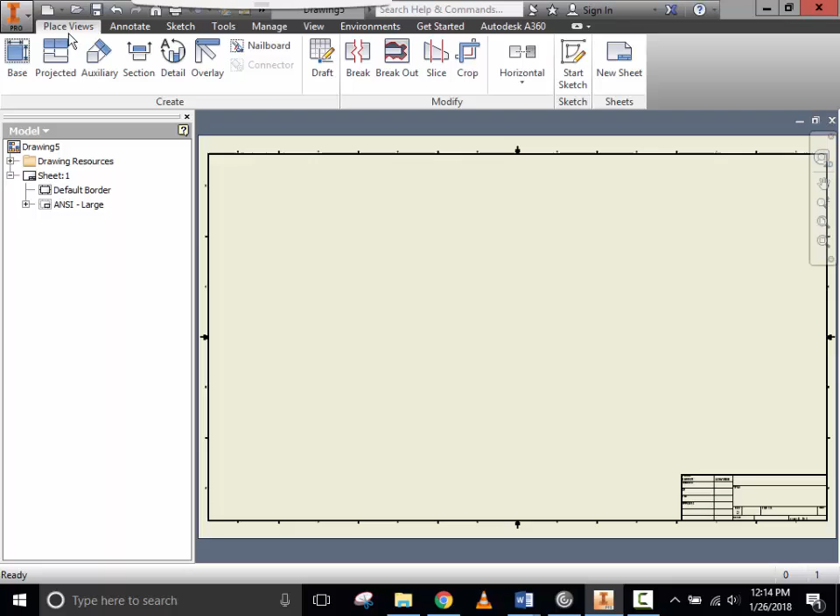Click and create. This brings us to the Place Views tab, where we are going to select a base view for this.

We need to go search for that in the file. We need to open an existing file and search through there, and you need to select your H drive to find this because everything is saved in there.

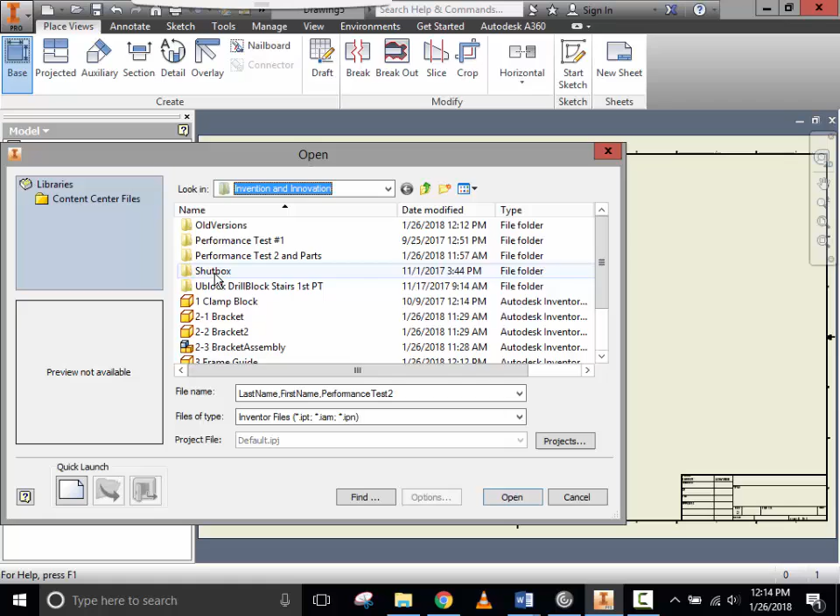As you've seen in previous videos, I have some extra folders within my H drive, and we're going to find our full assembly. I would like you guys to open up the Shutbox final assembly.

And we're going to drag this drawing view box just slightly off our screen so we can see a little better.

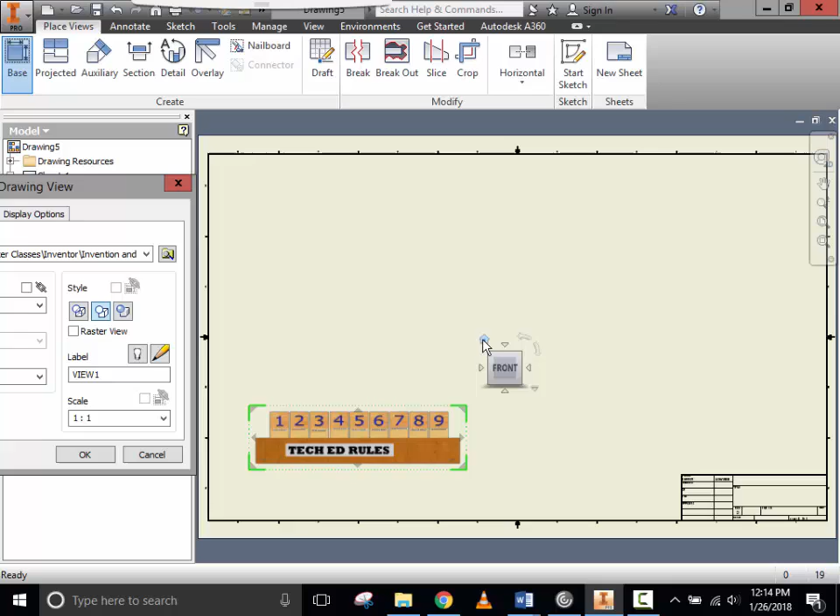I want to come up and grab the home view of my Shutbox, and I'm going to click on it and drag it off to the side.

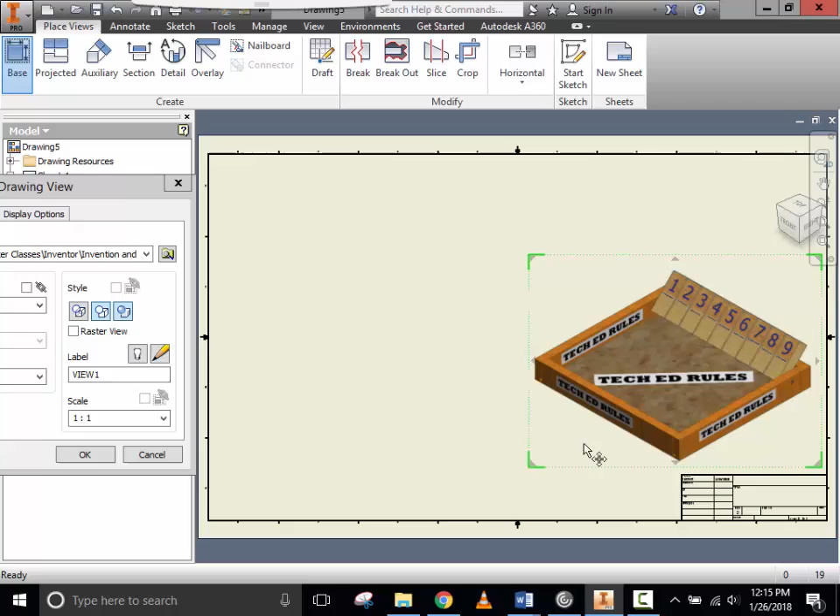Now it comes in a little small, so we can experiment with sizes. If we went 1:1, that does fit pretty good. If we try 2:1, it's a little too big.

So we're going to have a 1:1 Shutbox over here on the right. We want to make sure that it is shaded. If this is not already highlighted blue in the background here, you want to click to highlight it and click OK.

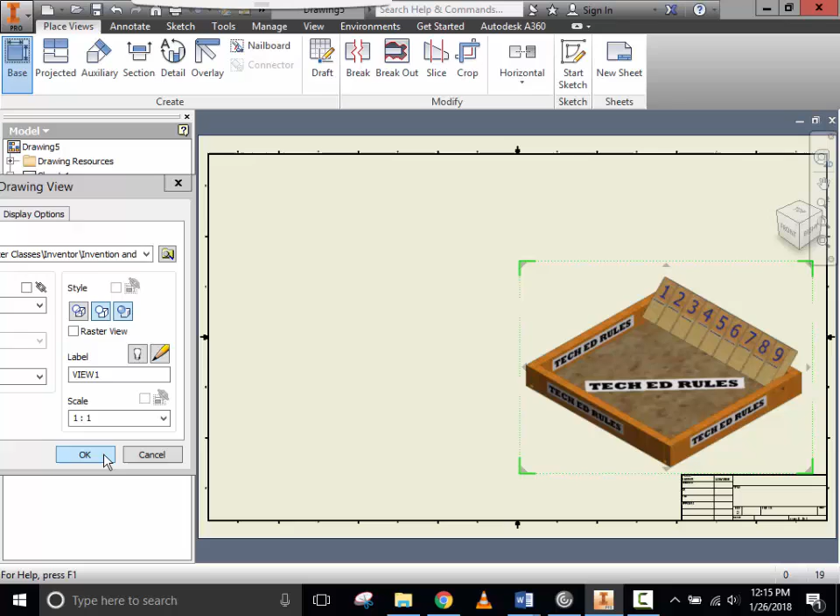Next, we're going to come and grab a base. We're going to search, and we're looking for the exact same assembly. This time, I'm going to have you select the home view.

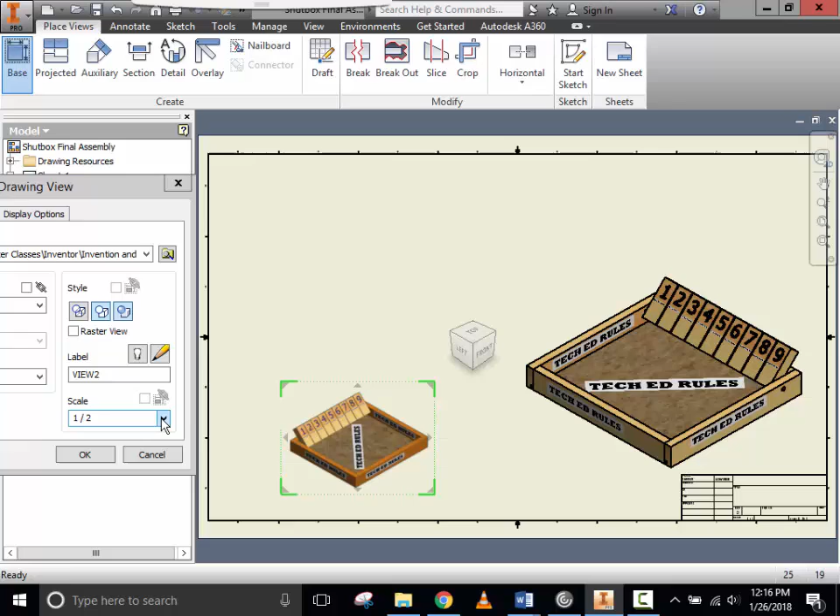Instead of just using the home view, which is this corner right here, we're going to select this other front corner so we can see from both directions. This is also going to be set to a 1/2 scale. We're going to line it up by clicking and dragging and make sure that it's shaded before we click OK.

Now both of these, this is the same file, you notice is made with all of the tech ed parts. These were the ones that were given to you if you needed to use them. But let's say yours was a mixture.

You used some of our parts and you used some of yours. If this is all you turned in, you could only get a good grade for the assembly, which is all together. There's no grade here for the parts because you don't have any that you've drawn yourself.

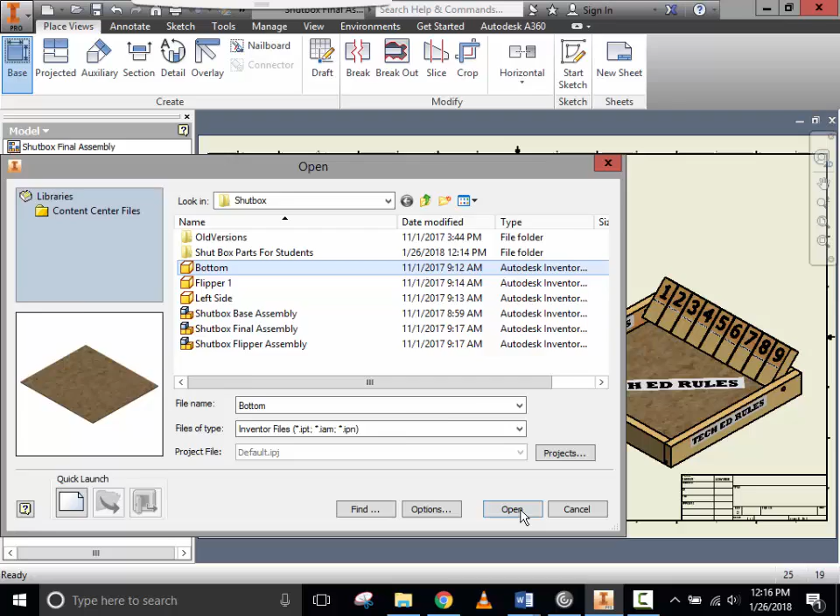So if you drew some but they're not part of the assembly, we're going to come up to base. We're going to search, and you're going to grab any part that you made that is not on there. For instance, this base here, the bottom, I'm going to go to the home view, click, drag, I want it to be shaded, has to be shaded, and click OK.

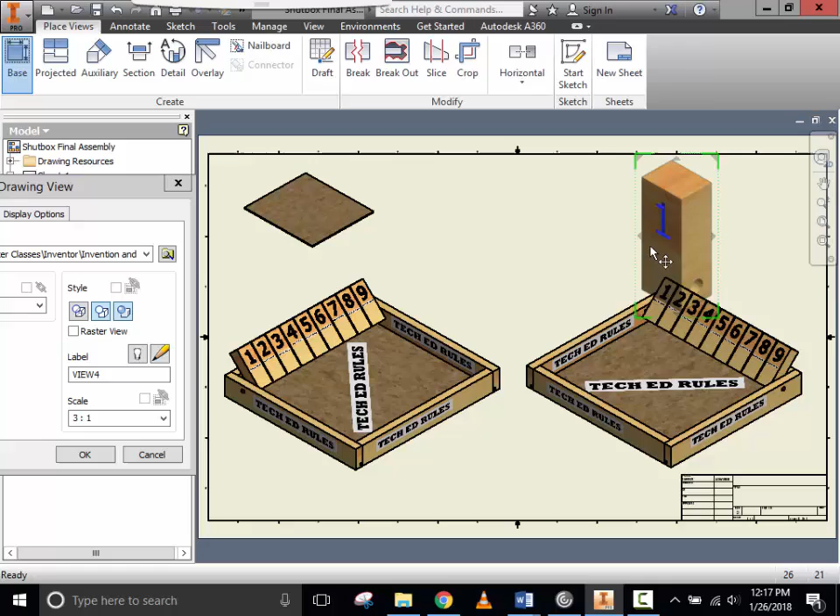I'm going to grab a base view and search. I made a flipper. I didn't make all 9, but I made a flipper. I'm going to go to the home view, click, drag. If you want to make it smaller, you're welcome to do that. Make sure it's shaded and OK.

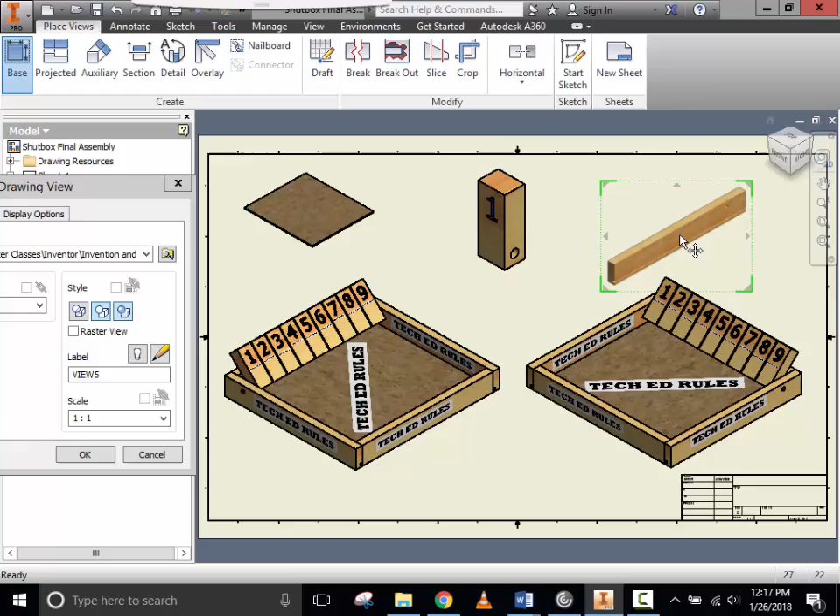I actually drew one more part. I'm going to search, and I drew the left side. So I'm going to go to the home view. That looks like it'll fit just fine. It's shaded. I'll click OK.

So now you can get a good grade for your assembly, and you've shown me some of the parts that you've made. Hopefully you've made all of the parts and used your own, but if you did have to use mine, I want to see what you drew also.

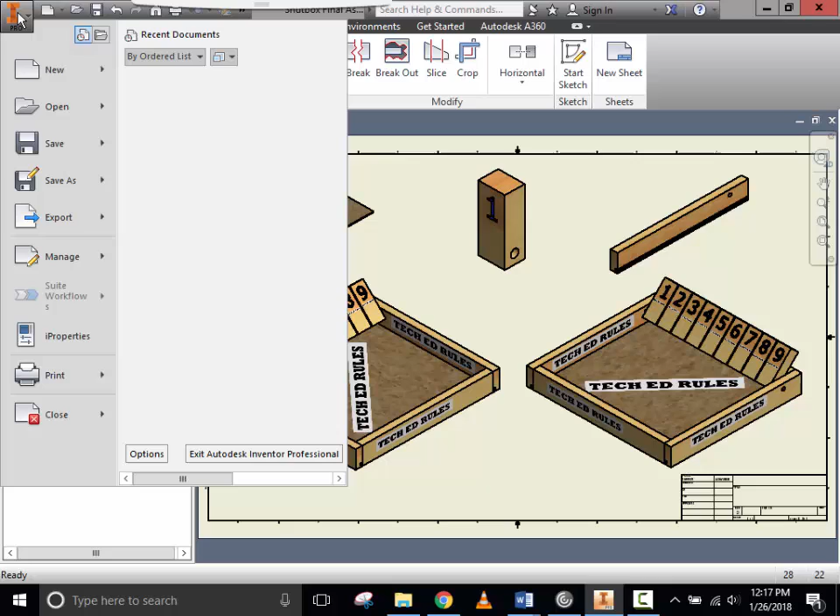Finally, we're going to come up to the Inventor icon. We're going to come down and click Save As, and we are going to save this to our H drive again. Make sure it's going there, not into your network or your C drive.

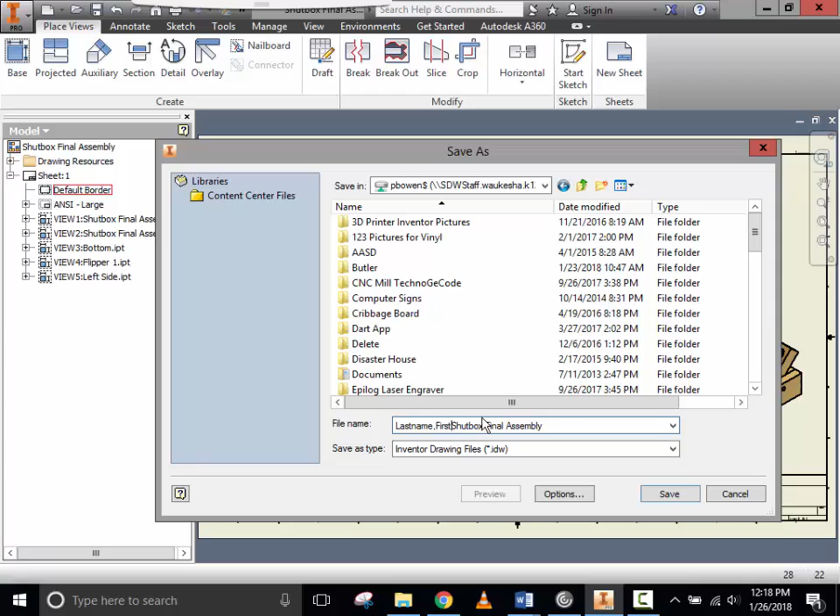H drive, and it's called Shutbox Final Assembly. That's pretty good. I'm also going to call it last name, comma, first name. Again, these are your actual last name and first name.

Shutbox Final Assembly. I'm going to click Save.

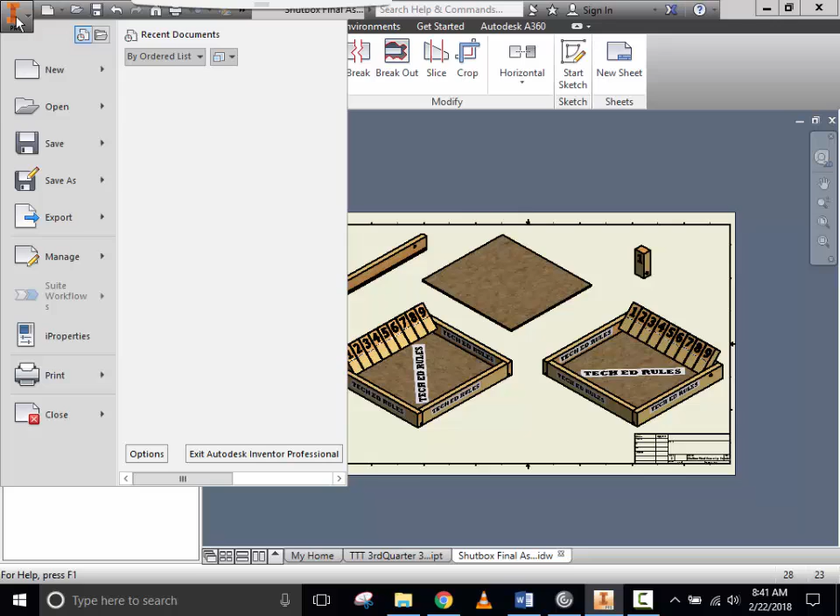Now that our IDW is saved in the H drive, we're going to save it as a PDF so we can turn this into Google Classroom. Our final step is to come to the Inventor icon and click Export and export as a PDF.

Now it's okay if it has the exact same name because it is a different file type, and we're going to see it in our H drive with the IDW and the PDF. So we're going to click Save.

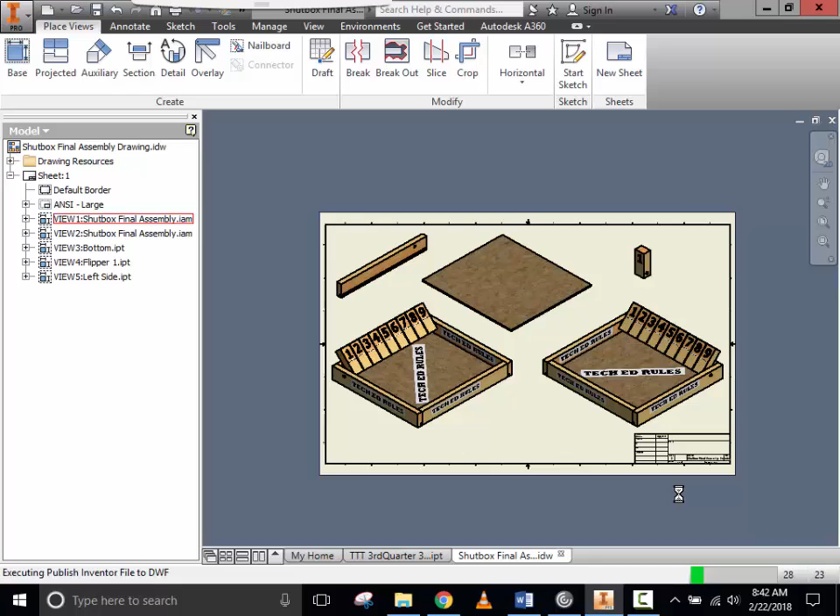A lot of times it opens it up in Google Chrome for you. This is the file that we're going to use to turn into Google Classroom. Good job. Your Shutbox project is complete.